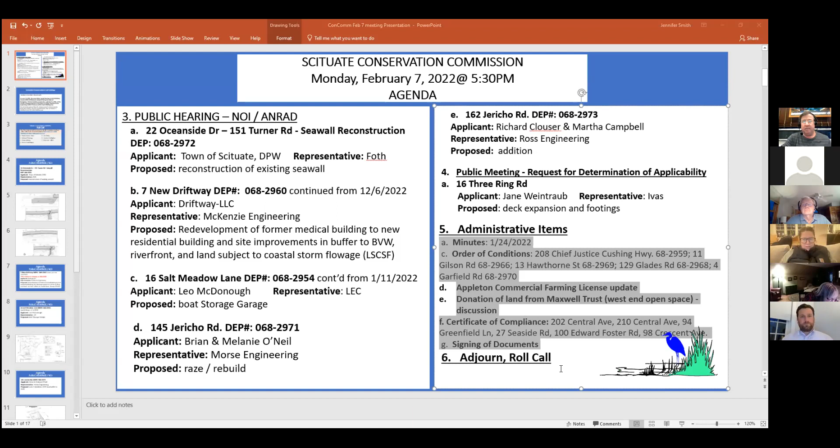Evening, everybody. Hey, Doug, Hi, Doug. How are you all? Just living it for a Monday night. How about yourself? Did you say just living it? Just living it, yeah, living the dream, living large. All right, we're all good to go. I can read my spiel. Yep, read. Okay, spiel.

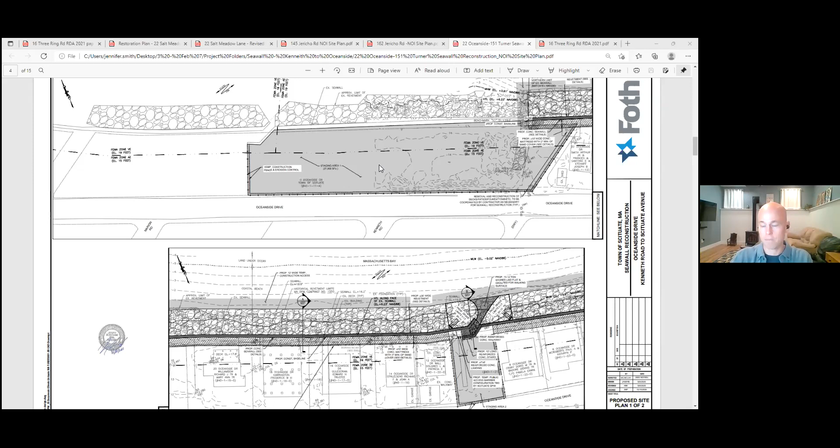On the southern end of the project, adjacent to or across the street from the end of Scituate Avenue, is where we are proposing a full ADA accessible ramp extending from Turner Road all the way to the beach. That ramp would be on a 1-on-20 grade all the way from Turner Road down to the beach. Where it goes through the seawall, it goes to 1-on-12, but then we have a handrail attached to the seawall that meets accessibility guidelines. So we do have some accessibility considerations in there.

During construction, I'll talk a bit about that. The town is currently coordinating with homeowners for easements for the project, as they've done in the projects to the north. They understand that each individual homeowner is going to have the choice to allow an easement for the town.

I don't want to speak to this too much - this might be more a conversation for Sean - but I just want to note that the easements will be coordinated and sought after for each individual property, and homeowners are not going to be forced to give that easement. A lot of them, it would be a good idea to, but that would be up to each individual homeowner. Once the project's underway, the contractor, to start the project, does a full existing condition survey of not only the land and the structure itself to be replaced, but the abutting homes as well.

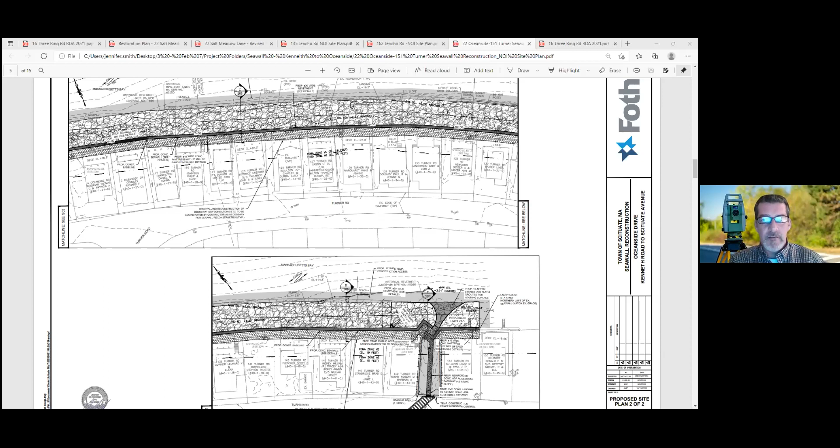In terms of getting credit for it from the EPA, I'm not sure - they're focusing on point discharges more than anything, the outfall type discharges, going directly into the harbor or things like that. Their file comments were just that chapter 91, 401 and MEPA were required, so those are underway. Turn it back to you, Frank.

Okay, thank you. Richard, do you have any questions or comments? No, not at this time, Frank. Okay, Doug? No, looks like a good project - I'm sure the residents there will be very happy to see that seawall beefed up, helping protect their properties. A nice, very thorough presentation, so there's nothing left to be asked on my end. Okay, thank you, Penny?

Penny, any thoughts on that one? Or how about Jake? Jake has lots of thoughts. No, I think it was a very good presentation, he covered everything thoroughly. All good, thank you. Jen? No, I'm good for now. Thank you, Andy? My questions were answered. Thanks, Brendan? I am good. Thank you.

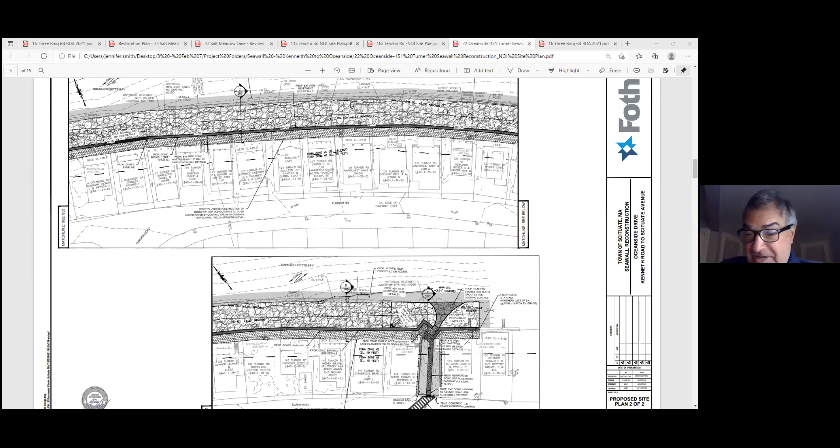It's just an observation. We can speak to a geologist about that, but I kind of differ with that. I think there's just a southern migration of sand, and it pools in certain areas. But I'm not a geologist. We've been looking at these projects.

When I was a kid, I could jump off the seawall into the sand. And there was plenty of sand. You could walk halfway out to the rocks and mine it. And this is a concern. It's a combination of sea level rise and changes in the ocean.

One of our former conservation agents was a coastal geologist and took a lot of time to explain the situation that's happening here.

Ideally, we would be seeing beach nourishment projects, but the magnitude of sand that has to be brought here, there'd be trucks backed up in Scituate forever, just dumping sand in front of here. And I think in Humarock, we talked about the possibility of a berm, because Humarock's a barrier beach.

So that functions a little bit differently, but I'm happy to have Jeremy or Sean reach out a bit and get some input from your observations with the sand. But I'd be hard pressed to think that the revetment in front of the wall is the cause of that. Maybe you guys can come up with something, Jeremy.

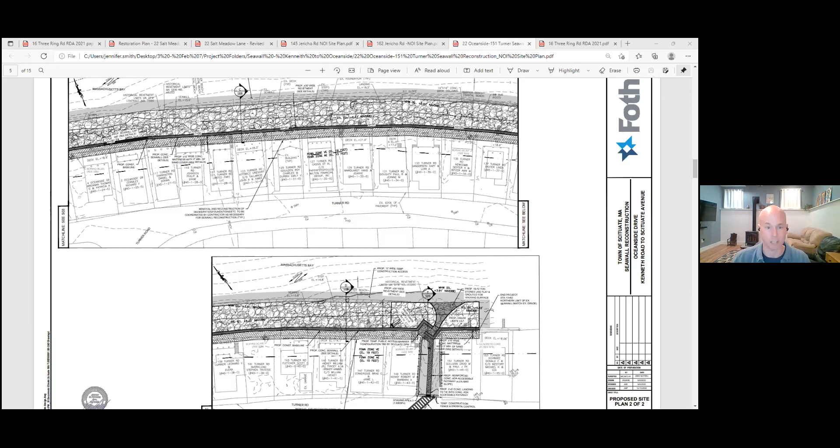Beyond that, if these walls and revetments had never been installed 50 years ago, I do think it would be a different discussion now. And this isn't unique to this area. This is happening in a lot of places in New England where we're seeing this in coastal zone management. They're struggling with what they allow these projects to propose, and whether they want homeowners to retreat, or propose beach nourishment projects where it's literally just dumping money into the ocean every year. There's not a single silver bullet that's going to be amenable to everybody. So at this point, the town has really just been trying to hold the line and continue to reconstruct the existing structures and protect the homes and infrastructure behind it.

Just let me jump in. Amy, does CZM give you any review or input on this project? Coastal Zone Management is another entity in the state that we often consult with when there's concerns of altering this type of thing. Do they give any feedback? So they will be one of the agencies that provide interagency comment, taking a look at this at the next level up before we close out on it. So yes, we've got some comments in already, and hopefully, if they've got something to say, they will. I'm not so sure they're going to specifically talk about the sand issue, but they will talk about the proposed NOI that is in front of you now and implications that they see.

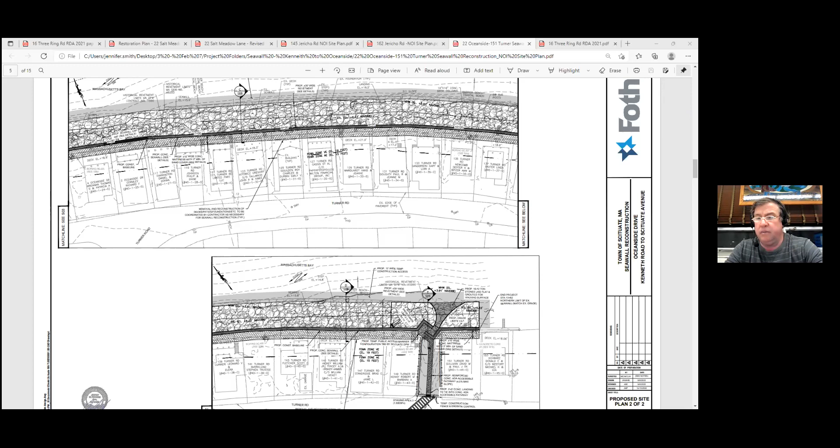Okay, I see we could move on to the next person. I just want to be sure we're not going to be closing this hearing tonight, Mr. Cass. So if you have some other comments, we're going to try to have a little bit more information. I don't know if there's something else before we move on to the next one. Is he still with us? He is, although he's muted. Okay, we can move on to the next person, which is Steve.

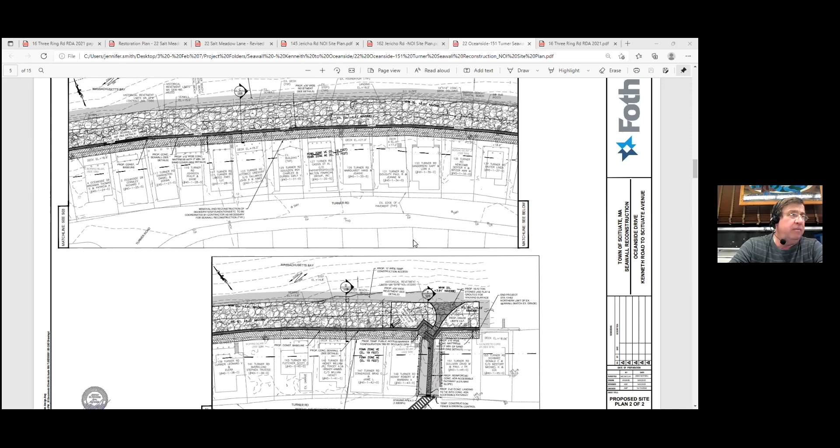I don't know if we can get those up on the screen tonight. We have 3 different slides that we are prepared to show. I'm not sure if they have a cross section on the ones that we've got. That's fine if they do it at the next meeting, just so long as they could understand that view before you close the public hearing. Actually, Amy, just move that one, or Jen, because that looked like the next one had a cross section. Yeah, there we go. There it is. That's it.

Okay, and that's something that's in the town hall that neighbors could look at. We have a file, yes, and also they're available online on our website. Okay.

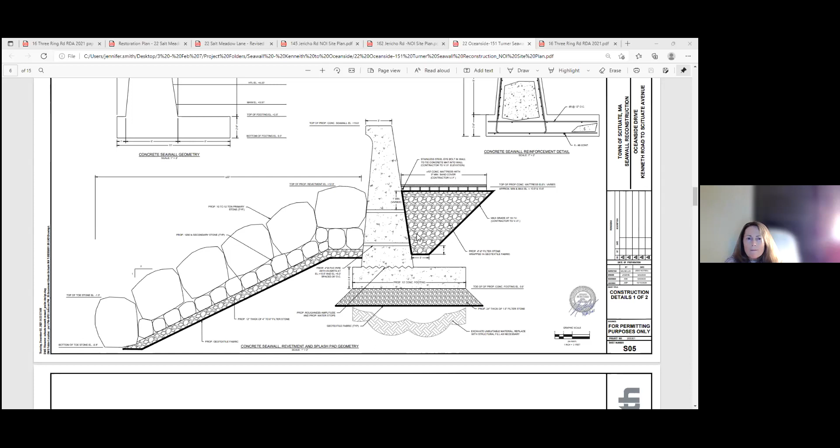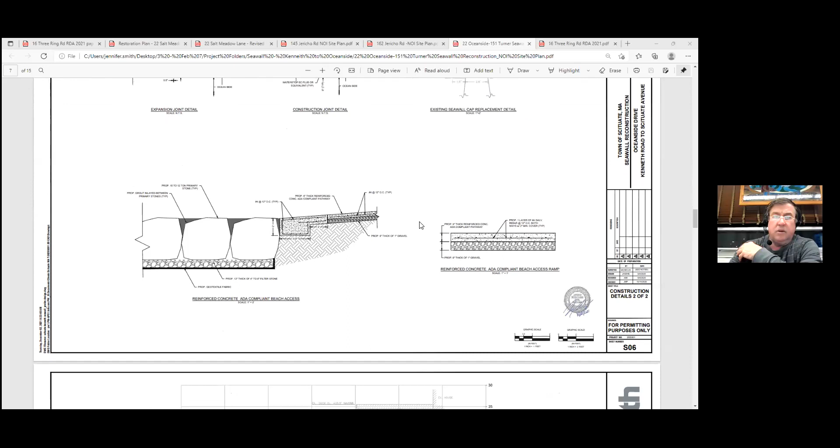All right, that helps. Okay, thank you. Anybody else? No.

I'd like to continue this, and I'm not sure how much time is required. The other thing, between Jeremy and Sean, is how long we can have these orders last for. I know this is going to be an ongoing project and subject to funding. So what's the longest time that when we condition this, Amy, that we can have that condition for?

Typically, they're 3 years with, and we usually allow at least one extension. I've seen 5-year orders go out, but I have not seen longer than that.

I'd just like to make this, hopefully there's funding available to get moving on this sooner than later, but I wouldn't like to consider doing it for as long as that when we condition or move this along. I'm just wondering if there's any way we can get some comment from Mr. Cassis, in regards to the sediment or sand. I'm wondering if there's anything else we can give him for information that would help.

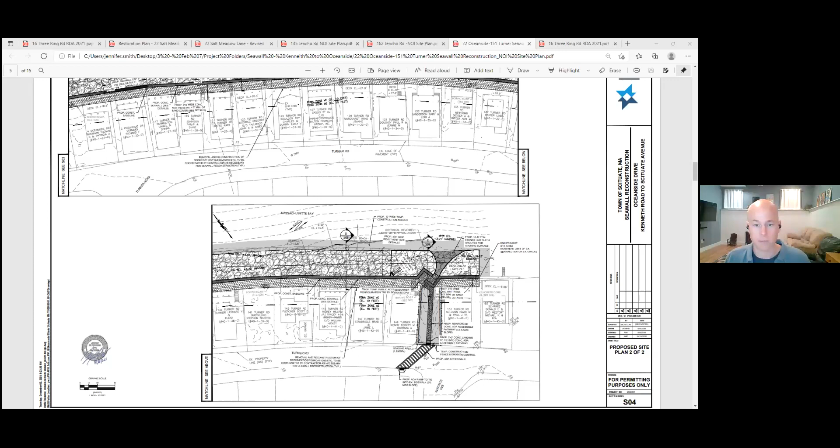I understand. That extra week might give extra time for this interagency review to pan out, and if it doesn't come through by then, we can easily move you to another one. We're just trying to keep the number of continuances down across the board, because it takes away from other submittals.

We do have two meetings back to back, one's the 28th of February, and the next one's just a week later on March 7th, and then the meeting after that is the 21st. So do you want to continue this to the 7th?

Do we have much on the agenda for the 7th? Jen, any idea? Starting to get full.

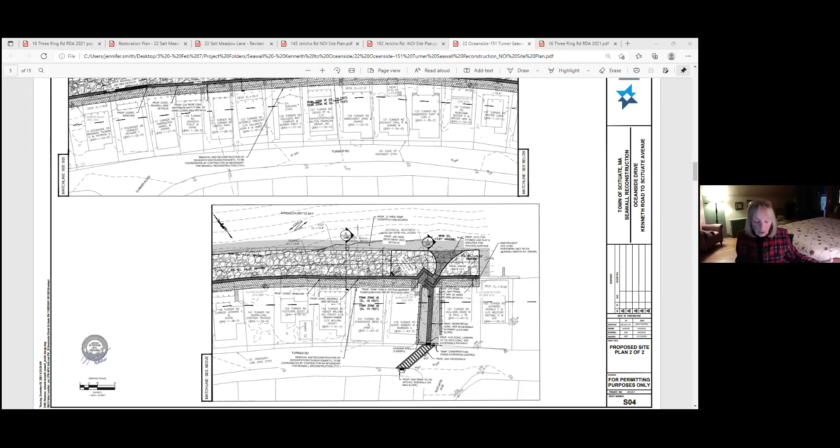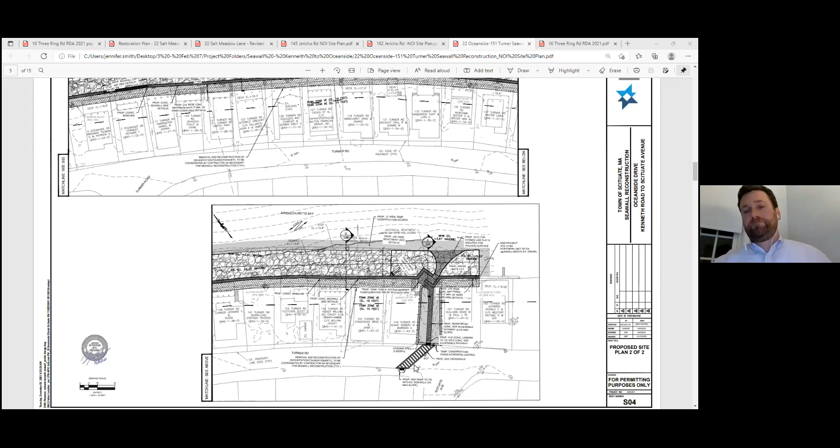All right, so we had a motion from Penny: I make a motion we continue 46 Oceanside Drive to March 7th. Do I have a second? Second, Doug. All in favor? Richard, yes. Jen, yep. Andy, yes. Brendan, yes. Frank, yes. Thank you.

Thanks, Jeremy. Thanks, Sean. So number 7, 7 Driftway, we have a request for a continuance to 3/21. I'll make a motion to continue 7 Driftway to March 21st. I'll second it, Richard. All in favor? Doug, yes. Jen, yep. Andy, yes. Brendan, yes. Frank, yes. Thank you.

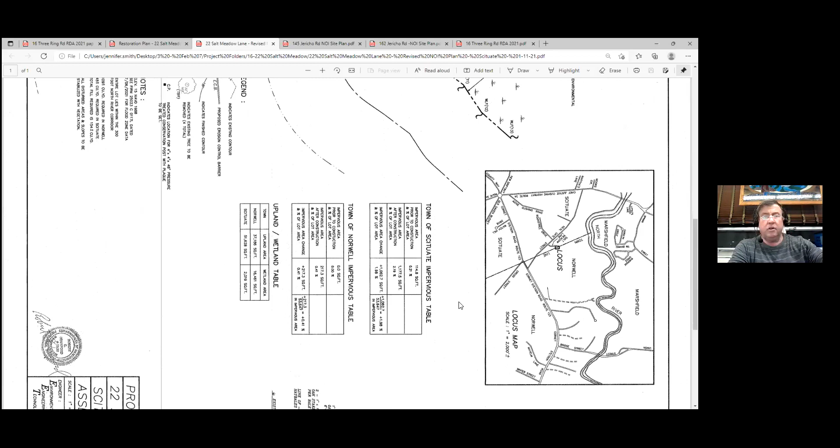Okay, 22 Salt Meadow. We have John Zimmer. Good evening. John Zimmer, before you start, just, Amy, do we have, are we expecting anybody from Norwell on this, or is this...?

I can give you a quick update if that's okay. All right, let's do that. Okay, we had our hearing with Norwell last week.

Since we moved all of the proposed activities associated with the project out of Norwell and solely into Scituate, we actually withdrew the notice of intent in Norwell and will be refiling an after-the-fact notice of intent with them for the fill that was placed within the buffer zone. And then we'll be working through a friendly enforcement process with them for some additional restoration for some clearing that was done in the buffer in Norwell as well.

So we're working through those two processes with the commission, but with respect to the proposed boat storage building, we withdrew that notice of intent. So there's no longer anything pending before them associated with the project.

Thank you, John. So why don't you go ahead and make your presentation, please. Unfortunately, I wasn't able to attend the last hearing. I know there was some discussion. We presented the updated site plan, which, as I said, moves all of the work into Scituate.

And in hearing the commission's concerns about the location of the boat storage building, we've actually moved it entirely, as well as any of the associated grading, outside of the 100-foot buffer. So right now, the only portion of the project that's actually within jurisdiction is a small corner, or maybe a third of the project, which is in land subject to coastal storm flowage.

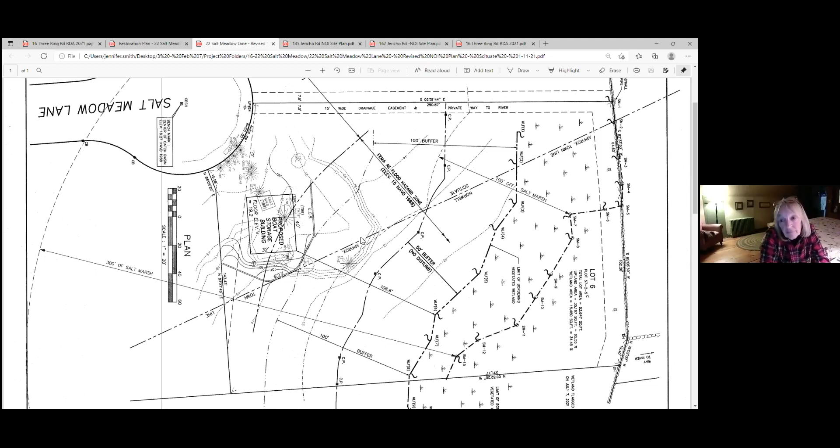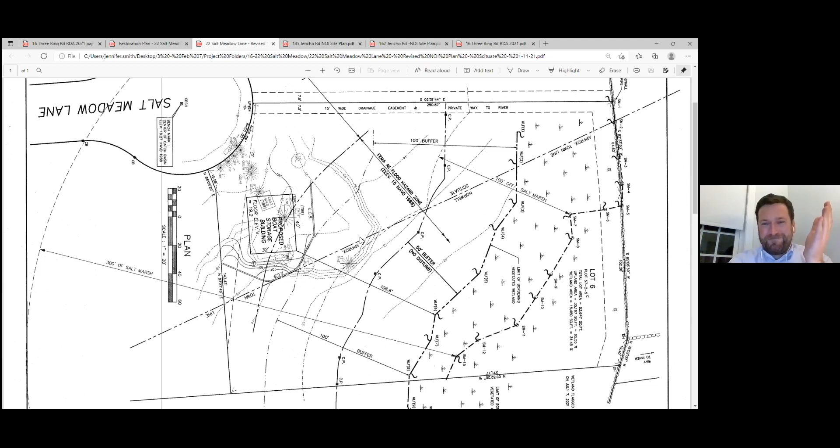I like that it's out of the 100, which is great. I was not at the last Norwell meeting, but I was at the one prior, and they were sort of all in on getting the fill out. Sounds like that may have changed. So administratively, I feel like we should coordinate that. We don't want them taking out all the fill up to the town line and just having it cut. I think we should consider finding out what Norwell is going to do, or somehow coordinating that, so this is one cleanup with one plan to get it fixed.

That's a good comment. John, can you give the commission a little sense of what Norwell, or what you're working towards with Norwell? It sounds like you're opting for mitigation over removal. Are you there yet with them?

We're actually pretty close with them. We need to submit the revised planting plan. We have a planting plan in front of them and they had some comments on it. They wanted to see more trees than shrubs, since the area is growing back with a pretty good shrub layer. They were definitely, to Andy's point, more amenable to allowing the fill to remain in place, partly for reasons Penny mentioned, since it would be a lot of disruption to go in and pull that fill back out, whereas we had the conservation markers and the planting plan in place. The square footage is actually pretty small, on the order of maybe 700 square feet.

So I think we'll get through that process with them, it's just going to take a little time. The other option is, if they do require removal of the fill, that's something we could always come back and address with the commission. But my sense and hope is that we're going to be able to move forward with a robust mitigation plan.

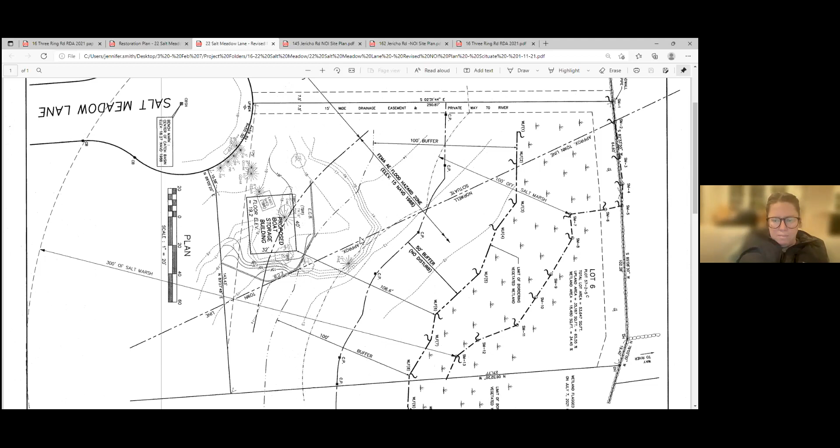Jen? I had not necessarily thought about Andy's perspective there, and it's super valid, and I'd really want to make sure we're in alignment. Outside of that, I understand Penny's sentiment on the fill, I still wouldn't want it there, but I think it's something to consider. Again, alignment with Norwell would be guiding my opinion there.

Thank you. Doug? I guess there are a lot of good points from everybody here. Do we have a sense of what kind of fill was put in? Is it general clean fill? Nothing hazardous in there or anything? I'm putting you on the spot, John, you probably don't know the answer to that, but...

Well, I don't know if we do have an answer for that. Mr. McDonough's on the line. From being out there and seeing it, it looked just like basic straight construction type fill used in typical residential situations, just dirt, rocks. So, making that assumption that the fill is fine and it's not leaching out anything hazardous.

I kind of agree with Penny. I think at this point, if you're offering a really robust planting plan, that extra vegetation should be sufficient.

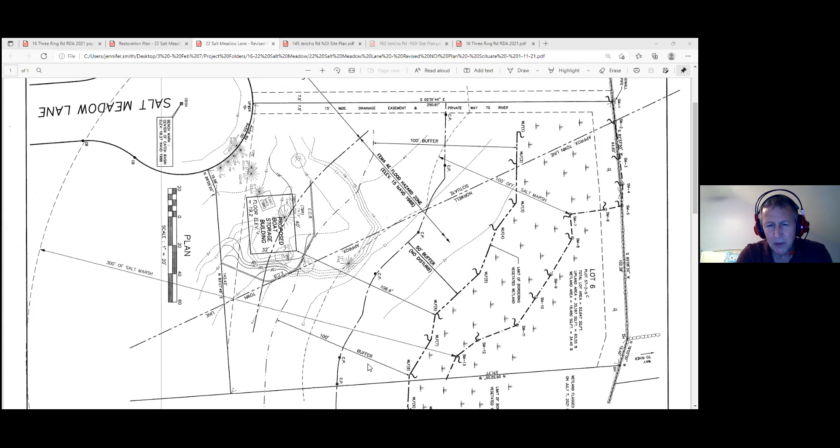Yeah, I tend to lean towards Penny's idea of not causing any more damage. You're going to have to dig that up, and then everything else that you planned is going to have to take the chance to get rerouted again, and it's more watching of that. It looks like maybe 3 feet at the highest point according to that plan, so just vegetate it.

Okay, thanks Doug. Richard? Yeah, I'm with Penny and Andrew. I think it'd be more damaging to try to take it out. I think it needs to be a coordinated plan, and that will be best served for everyone at that point. Okay, thank you.

Do we have anybody in the audience for this? Raise your hand if you want to talk, if you're an abutter on this one. Seeing none— oh wait, we got one. Kathleen Palmieri. Okay, hold on, Kathy's going to be on.

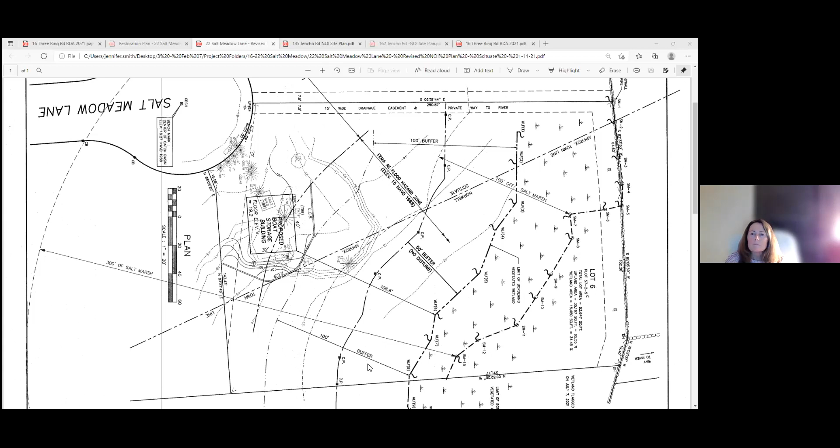Can you hear me? Yes. Kathleen Palmieri, 15 Salt Meadow Lane. I just have a couple of questions. This has been a real learning curve for me—I've looked up initials and what things stand for, conservation talk. I do have a question.

Is the North River Commission involved with this at all? Yes, they have been. Okay, so they're notified—I haven't heard anything from them during the meetings. I've attended all the meetings and haven't heard anything. I do see some irony—when we moved here about 21 years ago, someone asked if we wanted to move there, and I said why, and they said because if you mow the grass you have to notify the Conservation Commission. And now this has been going on for quite a while, lots of fill going in, fill going out.

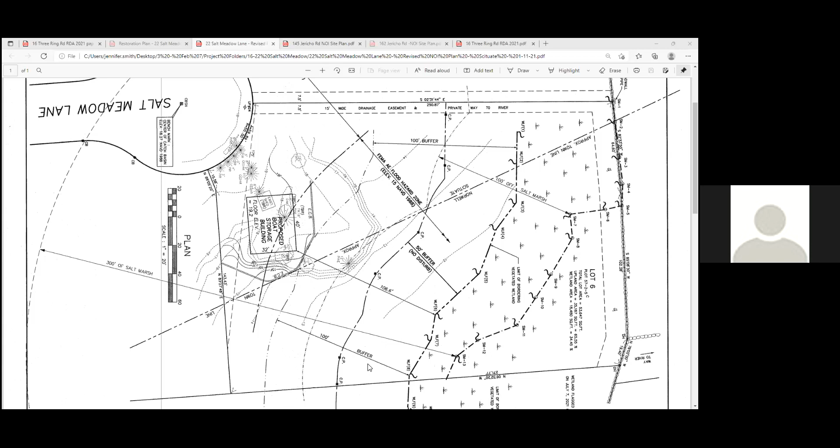I can only hope that the junk will be removed when the garage finally goes in—I know it's not in your purview at this point—so that we won't be looking at what's there now, and that's the purpose of the garage. Thank you, I appreciate being heard. Thank you.

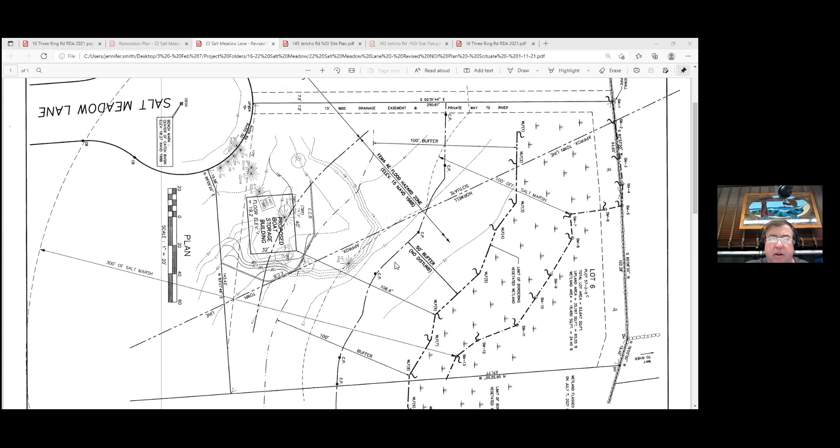Anybody else? I have one question, John. I'm looking at this plan—I see a building, but I don't see any gravel area, parking area, or access to the building. How does that take place? Yep, it's going to be coming in off the end of Salt Meadow. I believe a couple of the trees that are showing up at the end of Salt Meadow would be removed to provide access to that area.

So none of that work is located within the buffer zone. But it would be within land subject to coastal storm flowage. It would not be—it would be outside of that buffer as well.

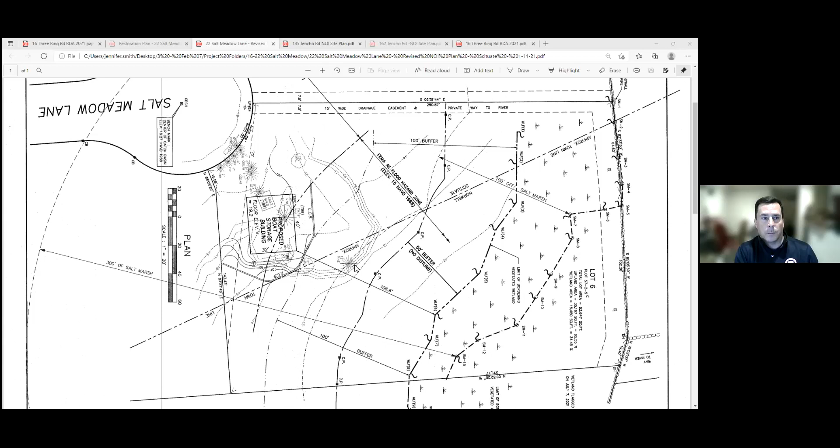If you see the limit of the floodplain, it kind of comes around and goes to the building, so the access would come in and be up. You would basically come in straight to the building off of... Okay, but the driveway would be part of the site design though.

And since the Conservation Commission is also tasked with administering and enforcing the stormwater bylaw, we're going to see all the areas that could be considered impervious as part of that calculation.

Just reiterating a little bit of my comment, but also trying to bring this back around so we can make it work. I would say that we want to stay on the same page as Norwell. I totally agree with that. So let's get a revised plan with their proposal on what they want to do, and call out the areas specifically for the plantings on the plan, maybe add the driveway.

So I'm going to say continue it for a few weeks so they can get us a revised plan. When are you continued with Norwell, John?

Well, we have to submit. Do you have a timeline with them? We're going to be submitting the updated, after-the-fact, notice of intent within the next week, probably by the end of this week. So we would be on their next scheduled hearing, which I believe is either late February or early March.

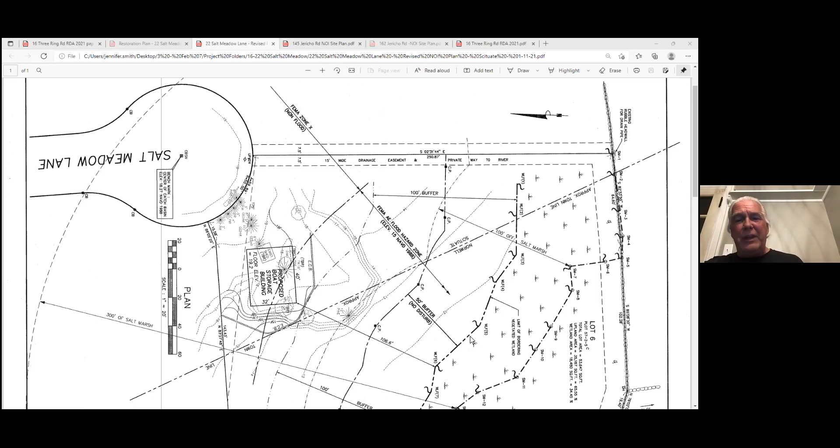So if somebody has indicated that this lot is in fact merged, and that's why the stormwater would have to cover the whole site, I don't believe that's entirely correct. I think it can stand on its own, but you are correct that you do need to show the driveways and all that stuff to make sure he's under the regulations. But I don't think he's going to get into any zoning issues tonight. That's all.

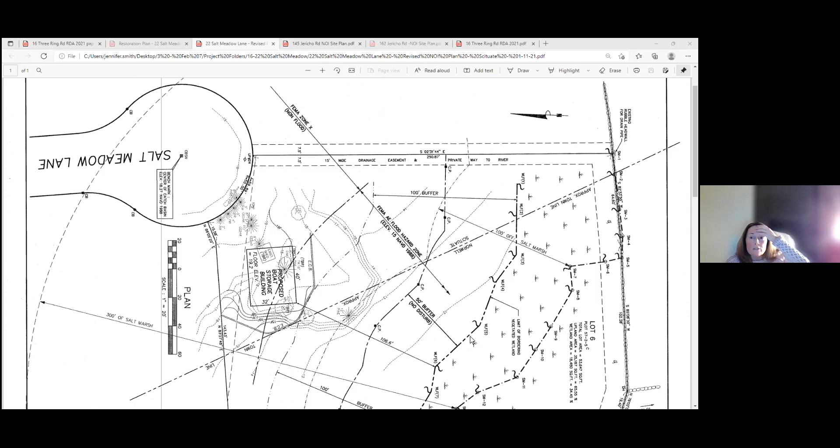And I don't want to, yeah, have the plan coincide or whatever, be the same plan that Norwell's looking at. Like, even though there's a town line down the middle, we should still see what's going on, so we can be on the same page for consistency.

Okay, if somebody could unmute John, I think he's dying to say something. I don't know about dying, but no, we would develop a separate plan. I mean, it would be consistent with the plan that we're proposing in Norwell, but since it would have to be conditioned under the performance standards of Scituate, we would have a separate plan implemented for Scituate, because we're going to have to do monitoring and reporting for both towns. So there would need to be some dichotomy between the two.

Okay, alright, how much time, John, do you need to revise that plan and get that? I know you're trying to move this along. Yeah, I mean, we could probably get it in by the end of this week or early next week at the latest.

So where would that put us for a meeting? I mean, if the 7th? Yeah, March 7th, and that way maybe they'll get comments from Norwell by then and have filed, if that's their timeline with them. Okay, because we want to know that it's all consistent. So to put them on before they get feedback from Norwell, I don't think is great, unless we just want to touch base and maybe not close again. I mean, I think the next time we should hopefully be able to close this if we could.

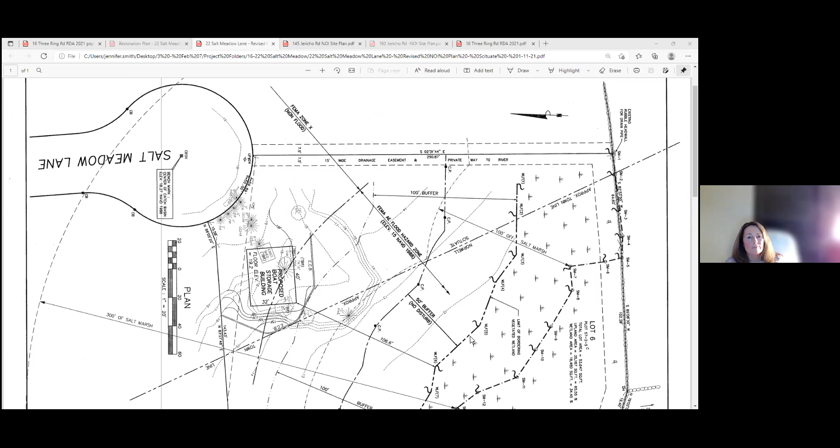Do I have a motion to continue? Penny, are you still out there, or did you fall asleep? We're here. Was it the 27th we were continuing? The 7th. I make a motion that we continue Salt Meadow Lane to...

February 27th. No, March 7th. Oh sorry, March 7th. Thank you, that was Jen. Do we have a second? Second, I'll, Andy.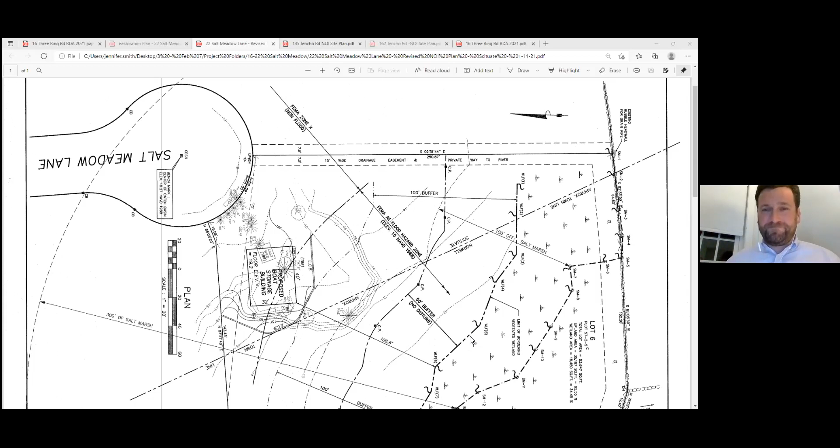Andy. So all in favor? Richard, yes. Doug, yes. I'm assuming Penny's gone to her other meeting, right? I think so, I saw her wave goodbye a while ago. Brendan, yes. And Frank, yes. Okay, great, thank you, John.

All right, thank you, have a good night. You too, thanks.

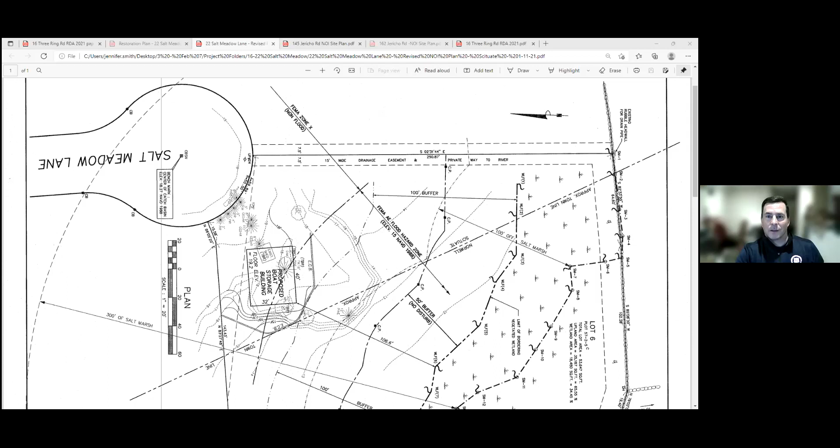145 Jericho Road. Oh, don't do that.

On February 7th, 2022, 5:30 PM in the Town Hall, the Scituate Conservation Commission will hold a wetlands hearing under Chapter 131, Section 40 of the Massachusetts General Laws and Section 30700 Town of Scituate Code of Bylaws regarding the application of Brian and Melanie O'Neill for work related to raising and rebuilding a single-family dwelling at 145 Jericho Road, Scituate. Abutters and other interested parties are invited to attend. Information to access the virtual meeting will be available on the agenda posted on the website.

So we have somebody from Morse Engineering. Yes, I'm here, can you hear me? We got you, all right. So just for the record, my name is Paul Gunn. I'm a design engineer at Morse Engineering, here tonight to represent the applicant for the notice of intent at 145 Jericho Road for the raise and rebuild of an existing single-family dwelling.

So the site currently has a single-family dwelling with an associated paved driveway, raised decks, and lawn, gravel, and landscaped areas. The dwelling was constructed in 1930 per the assessor's card and rests in a FEMA Zone AE, elevation 15. There's also a vegetated salt marsh on the abutting property to the north, the 100-foot buffer of which covers the majority of the property. The site is not located in any NHESP zone or DEP Zone A or 2 or an area of critical environmental concern.

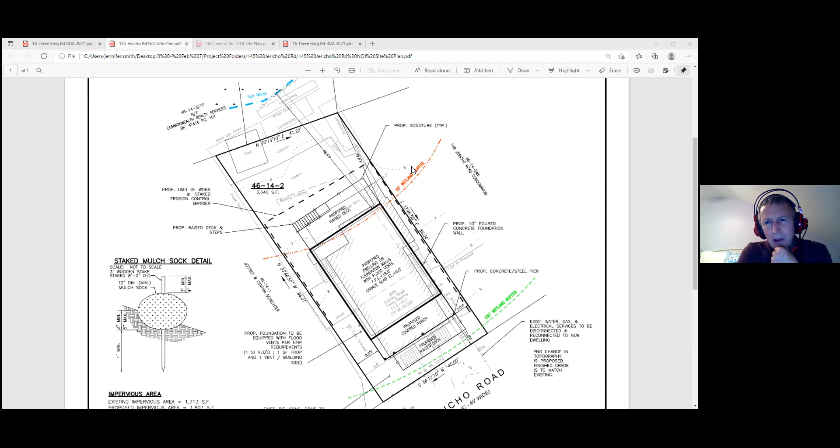It would be a significant change, I think, if — what are you suggesting, Amy, that we put in the orders that it's subject to the bylaw pending? No, I'm just suggesting that we put a condition, which is what we did for the house across the street, that the foundation plans be reviewed before building permit issues, to make sure, just double verify, that they are consistent with applicable standards at the time.

On the horizon — I mean even today, I actually got dates today of when they're going out for public comment. So they're coming. In 2022, they'll be implemented, and they are land subject to coastal storm flowage and new stormwater regulations. So 2022. All right, thanks, I misunderstood. So thank you, that clears that up.

All right, so, yeah, so the building inspector also will check that there is a required amount of flood vents per area and review that.

Okay, so Richard? I have nothing more to add. Okay. I really don't think I have anything else on this.

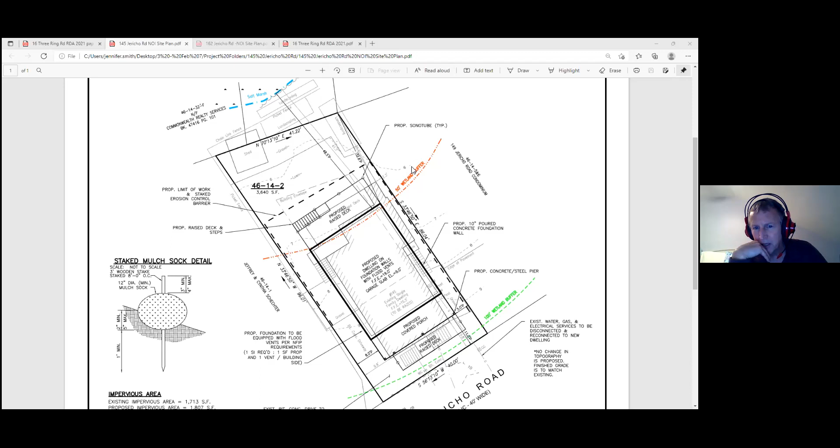I'm just curious, Doug, where did you see that they're trying to put a garage under it? Well, it says garage slab elevation 9.0 on the plan, and he did say they're gonna elevate it high enough they could actually get cars underneath. Okay, I'm just trying to figure out how you get them — oh, like the stairs, I guess, are the old stairs. Yeah, so those stairs in the front, the old stairs, that deck doesn't have any stairs down. Got it, it's a raised deck. Okay.

All right, I'll take a motion to close. I make a motion to close. Richard? How about a second? Second from Jen. Jen, all in favor: Doug, yes; Andy, yes; Brendan, yes; Frank, yes. Great, we close one.

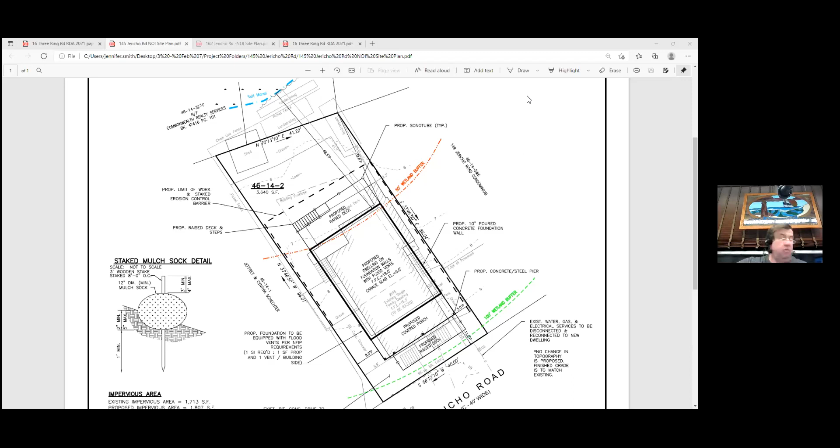162 Jericho Road. So on February 7th, 2022, during the 5:30 meeting at Town Hall, Scituate Conservation Commission will act on the request of Jane — oh, no, sorry.

Oh, you know what, Jen, I get two of the same ones. I can do this. Sure. Yep, been doing it a while. So, act on—

February 7th, 2022, 5:30 PM, the Town Hall, Scituate Conservation Commission will hold a wetlands hearing under Chapter 131, Section 40 of the Massachusetts General Laws and Section 30700 of the Town of Scituate Code of Bylaws, regarding the application of Richard Clauser and Martha Campbell for work related to an addition at 162 Jericho Road, Scituate. Abutters and other interested parties are invited to attend. Information to access the virtual meeting will be available on the agenda posted on the town website.

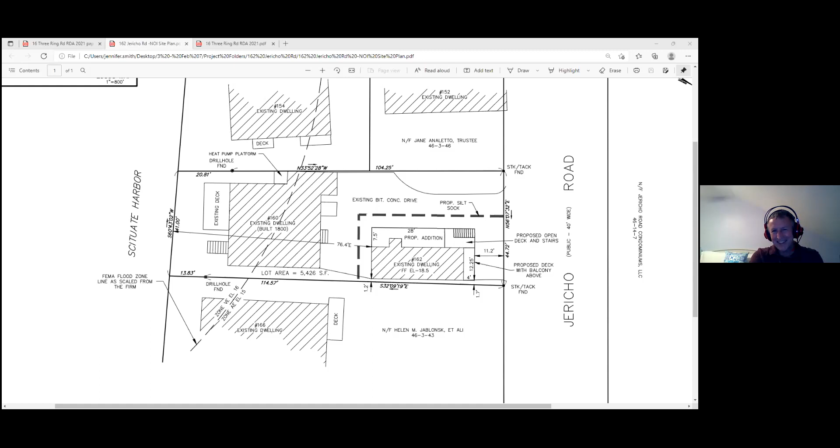I know, it's happy birthday, Paul. Oh, thank you. Merry Christmas. Wow, okay. Oh Doug, that's a surprise. Do we know which birthday this is? Jen? I have no questions and I do not know which birthday this is, but it's probably like 35. Wow, yes, wow.

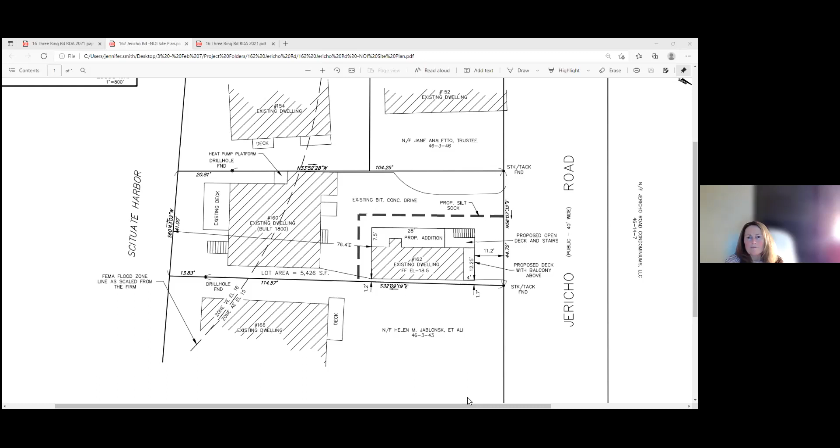Andy? I'm all good on this one. Brendan? Yeah, I'm good, no question. Do we have anybody in the audience for this one? And Amy, did you just say none? Or Paul, that the foundation is just going to be the same as whatever's under the existing dwelling, right? Yes. Okay, all right, well I'll let you get on with your birthday cake.

I'll take a motion to close. Make a motion to close. That was Richard, a second. I'll second it, that's Doug. All in favor? Jen? Yep. Andy? Yes. Brendan? Yes. Frank? Yes.

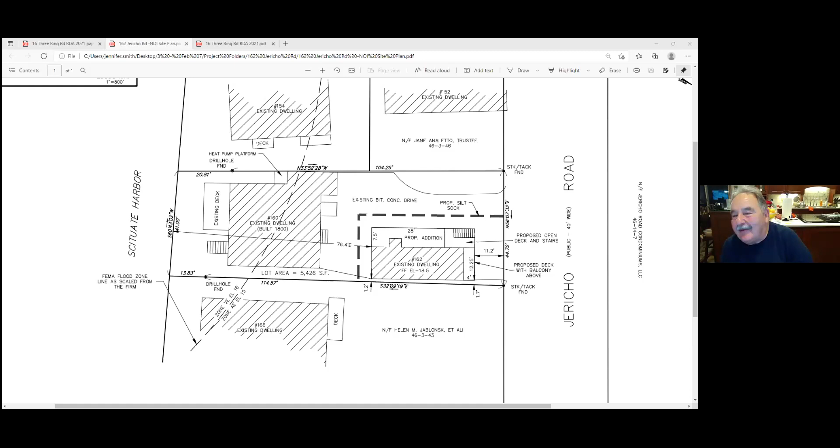Paul, you should have come in with something more for your birthday. You kind of wasted a simple project on your birthday, you should have come in with something a little more. It's not even his birthday. Well Frank, now that you mention it, there's a 72. Good night. Good night. Okay, thank you, thank you.

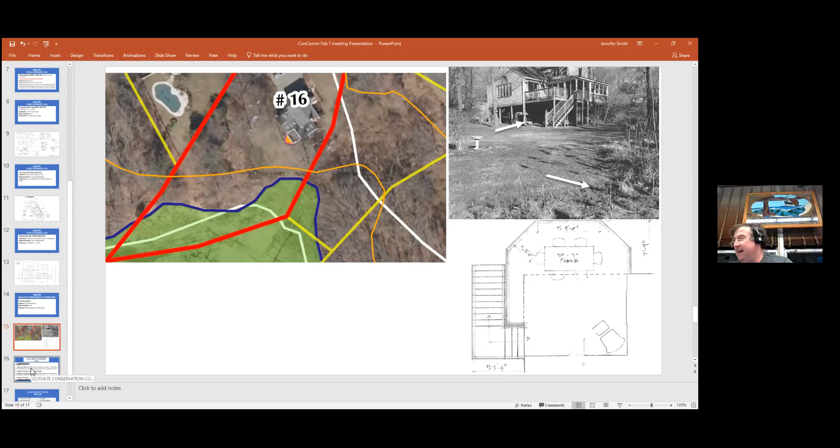A negative determination is a good thing - it means you don't have to go to the next step. Thank you. Good luck with your project. Thank you very much.

Orders of conditions. This is where we need Penny. So we have orders of conditions for 208 Chief Justice Cushing, 11 Gilson Road, 13 Hawthorne Street, 129 Glades, and 4 Garfield. Amy, you want to comment on any of these?

No, they were all distributed for your review and reading pleasure, but I don't think any of them were particularly complicated. 208 CJC had a little bit of extra language woven in because of the stormwater, and we had a few thoughts on that, like trees and stuff. 11 Gilson was a restoration plan and septic. 4 Garfield was a raise and rebuild - that one also had a little bit of special language, but I think it was all as noted.

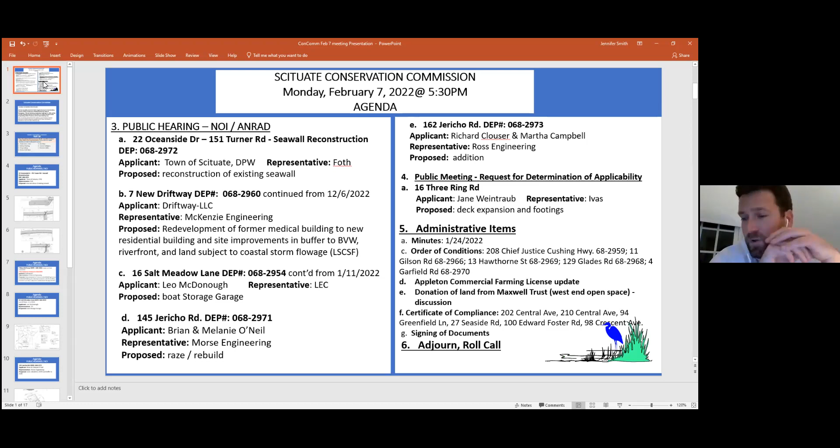Okay, I'm good, I'm in favor of it. Doug? Yeah, I think I'm in favor of accepting the property for sure. Jen? No issues. Andy? I think if we can hold it, we should. And Brendan? Sure, yeah. Well, that's what we want, some enthusiasm. Okay, well, I appreciate that.

Amy, do you think we need to take a formal vote of the commission? Might as well, I think we just did. Well, we went around, but could someone make a motion to vote to purchase or to accept? Move to go forward with the donation?

I make a motion that we move forward with accepting the donation of land from Maxwell Trust. I second it. Second from Richard. All in favor, Doug? Yes. Andy? Yes. Brendan? Yes. Frank, yes. Thank you. Okay, great.

Move this along and get us out of here? You want to do that? So, COCs, those are all waiting for signatures and ready to go. We'll be over sometime tomorrow. Yeah, raise rebuilds, projects that are so old that the work has been done for very long. That's about it.

You wanted to ratify an enforcement order? Oh right, so I've worked up a couple of enforcement orders. One is 7 Dunbar, with a letter that's just asking for what we asked for in the meeting officially, so that they know they can't just walk away. No penalty assigned at this point, but I gave a time frame of around April 15th, thinking the ground is pretty solid and it would be difficult to do that assessment because you're really going to need to do some soil borings to figure out where it was filled. But it would be good to get some progress going, so I think this makes sure he knows we're serious.